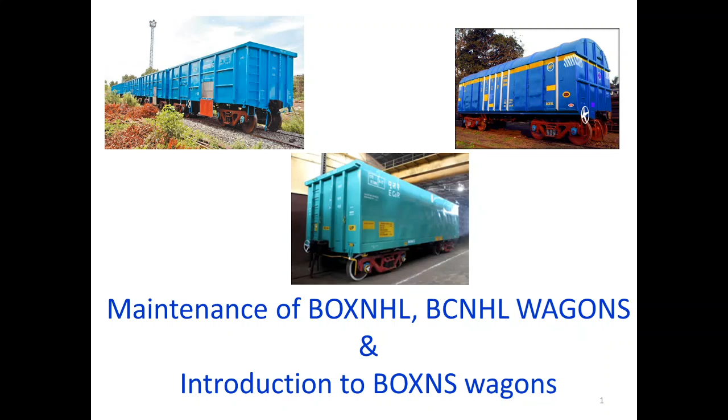Maintenance of box NHL, BCNHL wagons, and the introduction to box NS wagons.

With the economy of India growing at a very healthy pace, freight traffic has naturally been growing too. Freight is a profit-making business segment of Indian Railways, it is the bread and butter and backbone of Indian Railways. Revenues come from various sectors like coal, iron and steel, ores, petroleum products, essential commodities such as food grains, fertilizers, cement and others.

Indian Railway carries more than 35% of the total freight traffic of the country. Our target is 50% - in the coming 2 years we have to reach 50% of total freight traffic under Indian Railways. For that sake, we are striving hard to capture the market.

At present, two-thirds of our revenue comes from the transportation of goods traffic only. The other portion is from passenger and other sundry earnings.

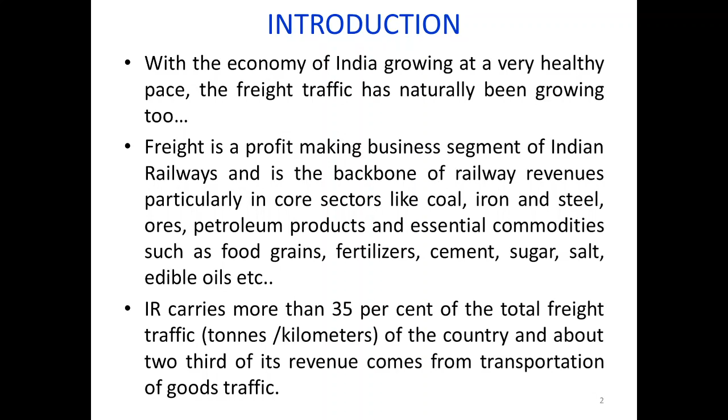To capture the market, we have to be friendly. We have to fulfill our customer requirements, like designing various wagons to meet the customer requirements. A quantum jump in the unit wagon capacity is the need of the hour.

One more thing is we have to reduce our tare weight of the wagon and increase payload to the tare ratio.

All our wagon stock should be switched over to 22.9 ton axle load wagons from 21.3 ton, and effort to bring lighter and corrosion resistant materials like IRSM 44.

Earlier we used IRSM 41 and IS 2062, those are corrosion prone. To give more life and less maintenance and light in weight, this IRSM 44, that is ferritic steel, is to be used on all our wagon stock, mostly open wagons and covered wagons.

In addition to that, to improve the payload to the tare ratio of wagons - just you can see here, BOXN wagon was 2.5. When payload to the tare ratio goes on increasing, we can achieve more commodity transported. Throughput will be more. If you compare with BOXN and box NHL, nearly 1 has been increased.

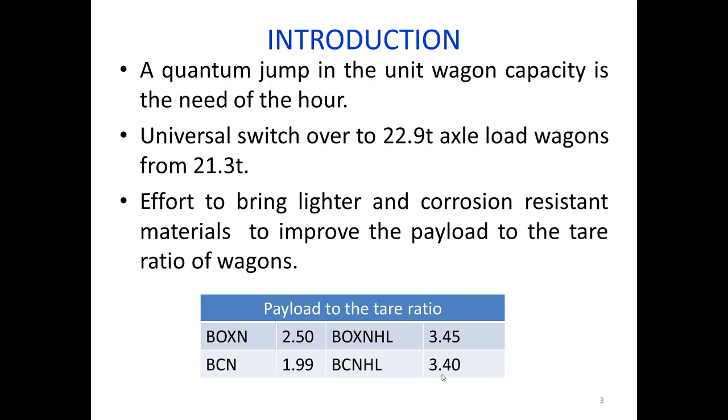We introduced box NHL, BCNHL in the year 2007. Main constraint is our box and BC wagons are more prone to corrosion because we used most of the stock with the IS 2062 mild steel.

Afterwards, we started using IRSM 41 corten steel, but it also did not give sufficient results. So we switched over to IRSM 44 from the year 2007 onwards by way of box NHL and BC NHL design of wagons.

Mainly continuous exposure of our wagon stock to moisture and air and high temperature regions plays a role, and repair practices resulting in localized heating. Sometimes we are not using proper current. If you use more current, it will deteriorate our metal wagon's body, and it may lead to corrosion.

And loading unloading practices resulting in damages to the employed surface protection - especially box wagons are more prone to damage while loading and unloading practices.

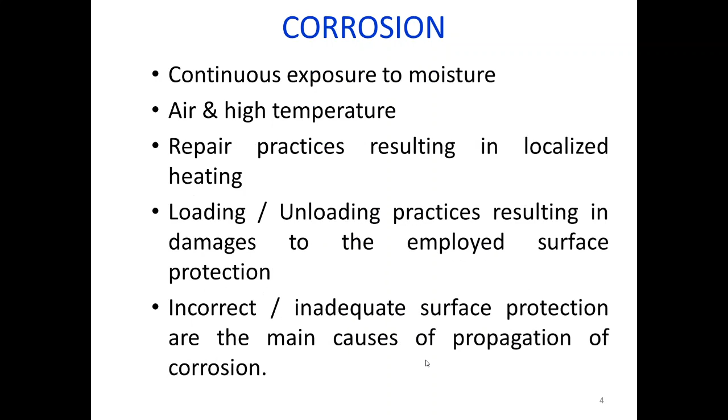So to overcome all this, railway board has decided to implement corrosion resistant steel to tackle the corrosion resistant raw material for fabrication of wagons. That material should be free to weldability and easy of fabrication - formability, bending, cutting, and all should be easier.

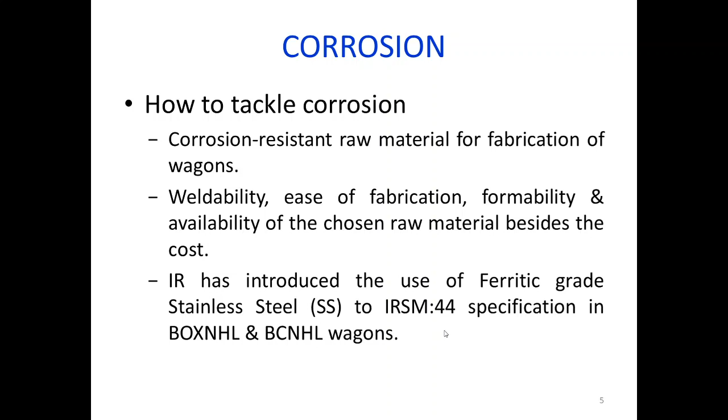And availability of the chosen raw material, besides the cost point of view; it should not be too expensive. For that sake, Indian Railway has introduced the use of ferritic grade stainless steel, that is IRSM 44. IRSM 44 is a ferritic steel that is chromium rich. It will be used on BOXNHL and BCNHL wagons.

Normally, chromium rich metal will delay getting corrosion. If you see in the graph, for example, 8% of chromium added in steel delays the corrosion. The y-axis here is mm per year. The metal cross section will get corrosion of 0.025. Here you can take 0.0125 only.

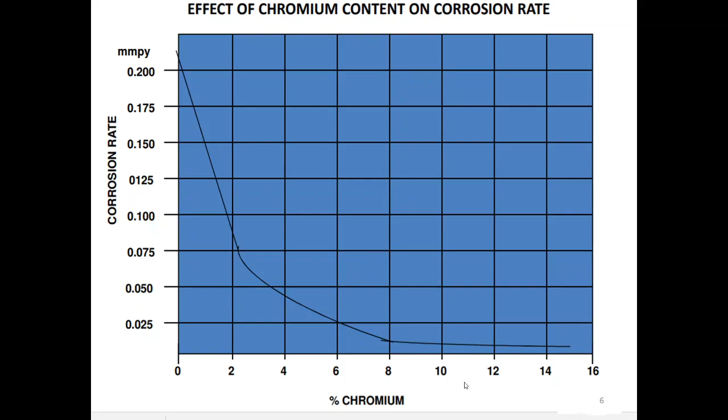If there is no chromium, it will get corrosion more frequently, meaning in less time it will catch the corrosion. To overcome the corrosion, we have to add chromium in the stainless steel material. If you go on increasing the chromium quantity in stainless steel, it will delay the corrosion to the metal.

By using stainless steel, what are the benefits achieved? Less corrosion. Less corrosion means reduced maintenance and reduction in tare weight. Moreover, the thickness of the steel: normally on the mild steel BOXN wagon the side body thickness is 5 mm, whereas in BOXNHL it is 1 mm less. Floor thickness for the BOXN wagon is 6 mm, in BOXNHL 5 mm. So automatically the weight of the body will be reduced, and the payload to tare ratio will be more.

Another advantage is less fuel consumption in empty running because of reduced load. No need to attach more locos, multi is not required, less requirement of loco crew and path, and extra line capacity is available, which will clear the section easily, and less incidences of out of course repairs. There is no corrosion, so automatically the duration of maintenance will be reduced.

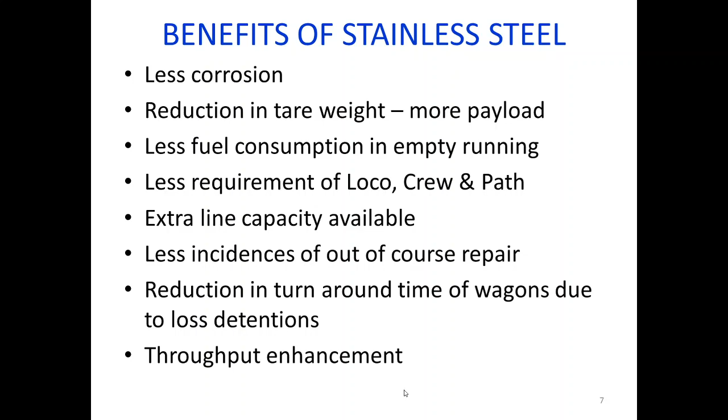This BOXNHL was designed in the year 2006. Mainly, it has to transport more load, more commodity. For that sake, we have enhanced the axle load capacity from 21.3 to 22.9 ton axle load for both BOXNHL and BCNHL wagons. It is the first all stainless steel open wagon with 22.9 ton axle load. It was designed in the year 2006. Railway Board placed orders for procurement of BOXNHL wagons in the year 2007.

Superstructure is all stainless steel for reducing weight and corrosion; the main body will be stainless steel. Improved quality coupler and draft gears. Initially they used WD-48-BD-028, and at present we are using WD-71-BD-15 for draft gears, and for couplers WD-70-BD-15 Revision 2. Lower brake block force with K-type composite brake blocks: instead of L-type brake blocks, in BOXNHL and BCNHL we are using K-type brake blocks.

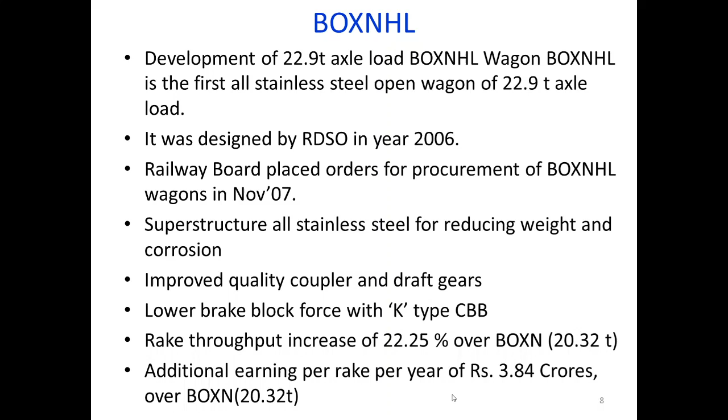Rake throughput increases by 22.25% over BOXN, and additional earning per rake per year is 3.84. These are the advantages with the implementation of BOXNHL. Coming to BCNHL, BCNHL is the first all stainless steel covered wagon of 22.9 ton axle load. It was designed by RDSO in the year 2006, and 2007 onwards we are getting the wagons.

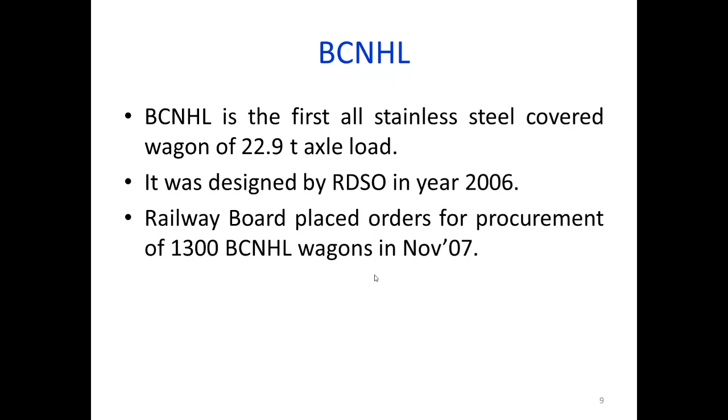The CBC provided on both BOXNHL and BCNHL wagons is a complete assembly of upgraded high tensile centre buffer coupler WD70. At present we are using WD-70-BD-10. Normally UHTC is stencilled on the side body of the wagon, showing these wagons are fitted with WD-70-BD-10. In addition, high capacity draft gears of RDSO specification WD-71-BD-15 revision 1 are at present used on BOXNHL and BCNHL wagons.

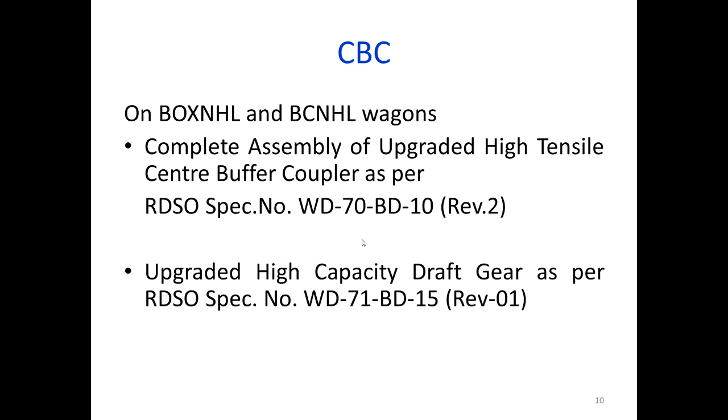By using these superior quality CBC couplers, we reduced train parting cases and knuckle failure cases also. You might have observed this. In addition, BOXNHL and BCNHL wagons initially started manufacturing with single pipe, especially BOXNHL, and BCNHL started with twin pipe brake system.

Subsequently, all the wagons are manufactured with twin pipe brake system. So, some of the advantages of the twin pipe brake system: it may reduce wheel skidding because brake binding cases will be reduced. So the train parting cases are also reduced. Driver feels more comfort in application and releasing of brakes.

So, in these BOXNHL wagons, one other item was introduced along with the bogie mounted brake system. Here it is, the automatic pressure modification valve. This automatic pressure modification device is interposed between the bogie side frame of the Casnub bogie and the under frame. Actually, it is fitted onto the under frame, and this is its arm. This unit will be fixed to the side body of the wagon, and this arm will touch the side frame of the Casnub bogie on the mid portion.

It is fitted for achieving two-stage load braking with automatic changeover of brake power. Normally, this activity was carried out earlier by the empty load gear device; that is replaced with this automatic pressure modification. This will be provided on each wagon. Only one APM is required per wagon, and it restricts the brake cylinder pressure. Normally, in case of empty wagons, the pressure that goes to the brake cylinder will be 2.2. This will be fitted in between the distributor valve and the brake cylinder.

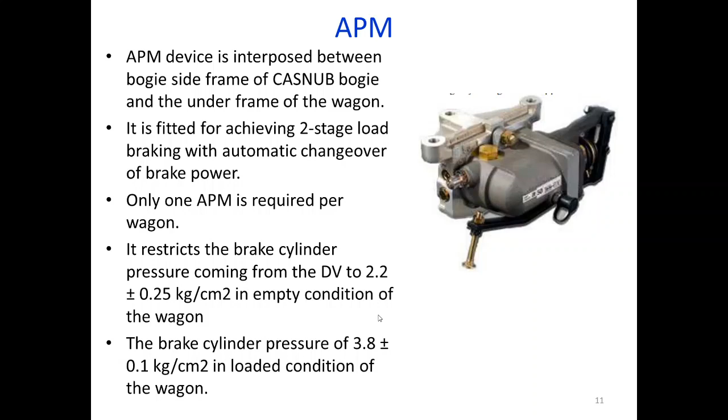So when the arm touches at around 104 mm length between the side frame and the arm, then 2.2 kg/cm² will be sent to the brake cylinder, in empty condition. Whereas if loaded, the length of the arm will be reduced to 80 mm. At that time, the brake cylinder pressure will be 3.8. Full brakes will be applied during load condition, and less but sufficient brake power in empty condition.

The sensor arm of the APM device comes down for sensing only during the brake application. The complete movement of the sensor point is 104, sorry, I said 140, it is 104. The first 80 mm of the sensor point is for the loaded zone, and the balance for the empty zone. Up to 104, the first 80 is the loaded zone. If it touches at 80 mm, the full brake power, meaning 3.8 kg/cm², will be sent to the brake cylinder. So firm brakes will be applied.

It has an indicator to show the empty or loaded position also. Whenever the indication is on, that is, showing orange color, it is indicating the empty condition with brake cylinder pressure 2.2. When there is no indication, it means the wagon is in loaded condition. The brake pressure will be 3.8.

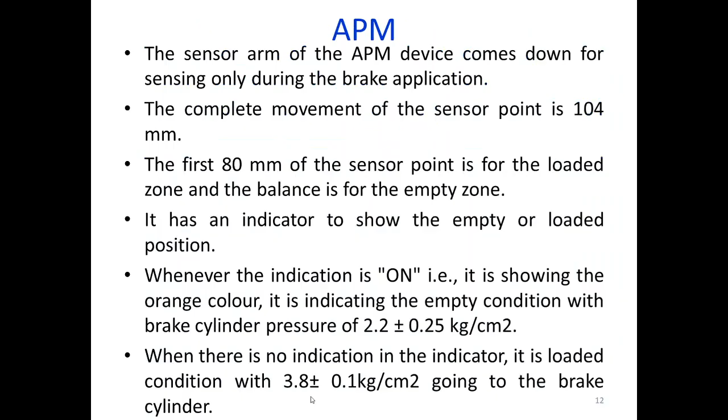Okay, these BOXNHL and BCNHL wagons have been provided with BMBC brake system with twin pipe brake, and the empty load gear has been eliminated with APM, and the hand brake system is provided on the ends of the wagon body. The handbrake wheel has been provided at the end of the wagon.

Okay, if you compare the wagon with the BCN, BCNA and BCNHL, the length has been decreased by 3.4 meter, overall width increased by 250 mm, and inside width by 401 mm. Inside height is increased by 347 mm. Height from rail level is increased by 288. Cubic capacity 10.9. Tare weight of the wagon is reduced by 3.75 tons. So, tare weight of the BCNHL is 20.8. So, it has increased the payload to tare ratio.

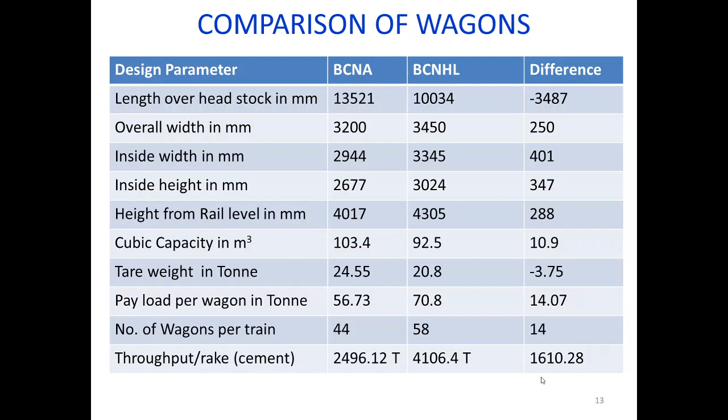And the number of wagons has been increased. Actually, the BCN wagon was 13.5 in length, whereas BCNHL is 10.034. We can accommodate approximately 14 more wagons in a rake, so that we can transport more commodity compared with the BCN rake, that is 1610 more tons per rake. This is the advantage over BCNA. All these superlatives will lead to more revenue for the railway.

Coming to BOXN and BOXNHL, here also length has been increased by 250 mm, overall width by 50 mm, and inside width by 72. Inside height also increased by 78. Height from rail level is 68. Cubic capacity has also been increased. Tare weight of the wagon here also decreased to get more payload to tare ratio.

Payload per wagon in tons is 71.0, so that when we are transporting a 58 wagon rake, around 750 metric tons more will be loaded at a time. This is the advantage over BOXN.

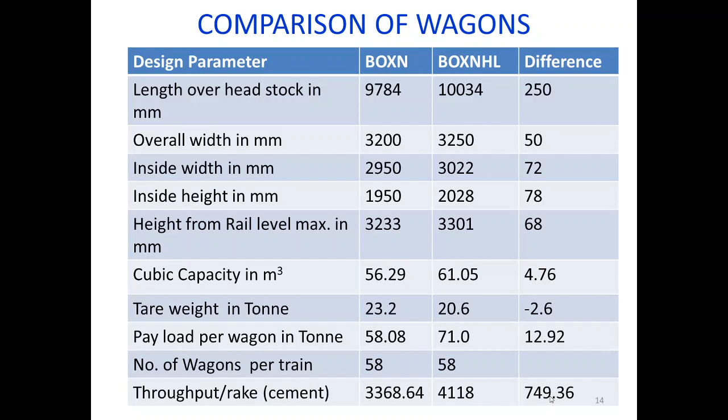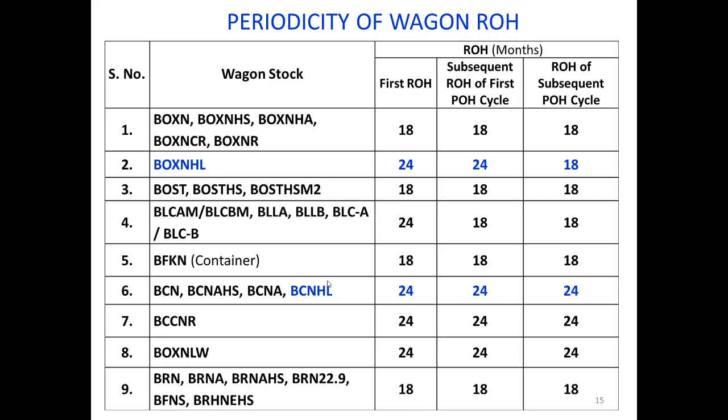Okay, periodicity. When we have to mark POH or ROH, there was confusion earlier, but it is clear that up to the first POH of the BOXNHL wagon, ROH will be 24 months. After the first POH, ROH will be 18 months. Whereas BCNHL is the same, similar to our BCN wagons. Coming to POH, the first POH will be 6 years, subsequently 4.5 years. Same in case of BCNHL, it will be similar to the BCN wagon.

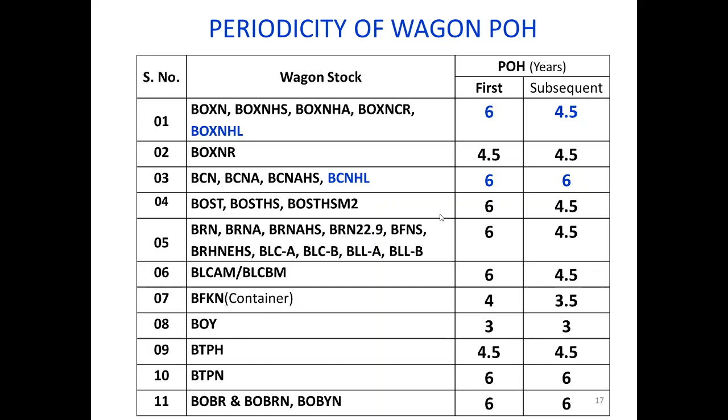Okay, it has been over 13 years since BOXNHL and BCNHL wagons were introduced over Indian Railways. In the past 13 years, you might have faced some problems with these stainless steel bodied wagons. Normally our staff, like fitters and welders, are not habituated with it, because IRSM 41 44 steel, that is ferritic stainless steel, will give some maintenance issues.

Maintenance issues like cutting. Normally, we cut our mild steel or Corten steel sheet with oxyacetylene cutting. Okay, but stainless steel is not so easy to cut with oxyacetylene. Its refractory index will be more, so we could not get an equal straight cut, and moreover there are chances to damage or deteriorate the material properties of the stainless steel. So it is not advisable to cut stainless steel material with oxyacetylene cutting.

So in each and every depot, workshop, maintenance sick line and yard, we have to procure plasma cutting equipment. Plasma cutting provision should be provided in all yards, depots and workshops, so that we can easily cut the stainless steel sheet.

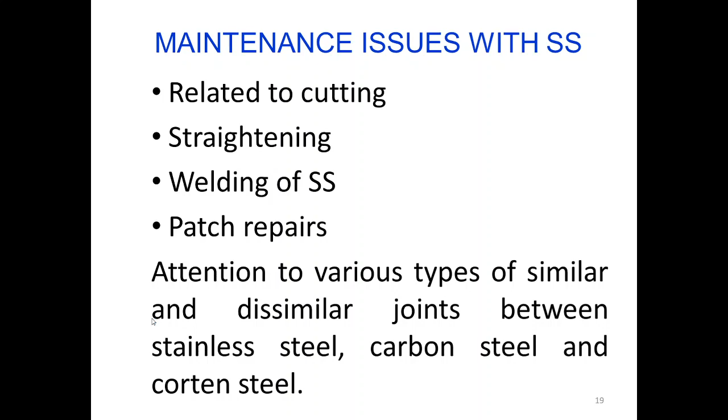Okay, coming to the particularities of stainless steel. Carbon steel rusts when exposed to air and moisture. Normally carbon steels like mild steel and Corten steel will easily corrode if exposed to air or moisture. But if the same steel is rich with chromium, then automatically a self-healing chromium rich oxide surface will be formed over the metal surface.

If you add chromium in steel, it will form on its own a self-healing chromium rich oxide surface film. For chromium, exposure to atmosphere means oxygen; if it is exposed to oxygen, it will protect on its own. So it is an invisible, adherent and self-healing chromium rich oxide surface film over the steel surface. Ferritic steel will have chromium so that it will protect on its own.

So our wagon body should be exposed to the air more. Normally, if any patch covers that surface and you are doing right round welding over the patch, any gaps or porosity in welding may lead to corrosion inside. Behind the covered portion it will corrode easily, because sufficient oxygen will not be there inside, and moreover water ingress will be there, so it may lead to corrosion.

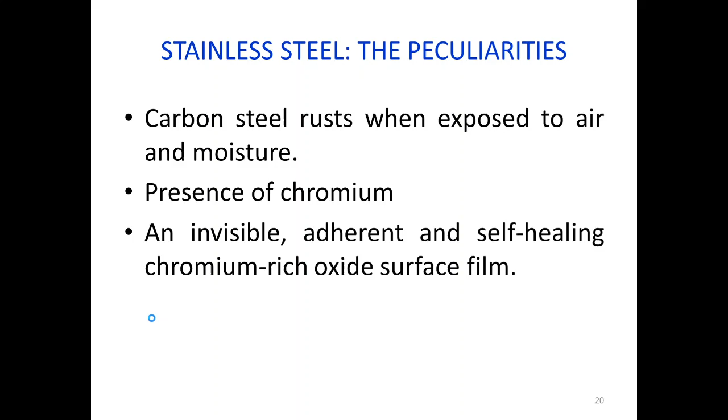Another peculiarity of stainless steel: when chromium is added to the steel, it is called stainless steel. This stainless steel will be tough because the chromium oxide layer is tough. So the tough chromium oxide layer also comes into play during repair, while cutting.

Especially in cutting. In conventional carbon steels, cutting is done by the oxy cutting process, the oxyacetylene cutting process. In case of stainless steel, it is possible, but it is not advised. Moreover, we could not get a correct cut, and it will deteriorate its material properties if you cut with steel cutting.

High levels of chromium cannot be cut by simple oxy cutting methods due to the refractory nature, the very high melting point of the chromium oxide which is formed as a top layer. Since it has a very high melting point, we keep exposing our oxy jet to that surface of the metal. This continued heating will deteriorate the chromium oxide layer, so the properties will be given up.

So ferritic stainless steels are generally limited in service temperatures. Normally, while doing welding also, we have to maintain 400 degrees centigrade; if you go beyond that, embrittling phases may also precipitate during welding. So these ferritic stainless steels are advised to be cut with plasma cutting.

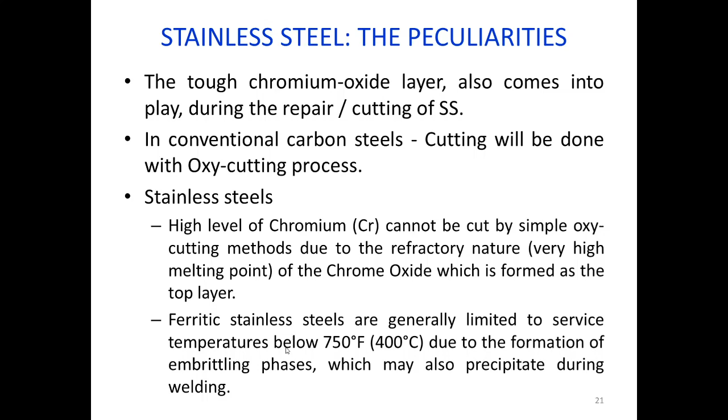It was introduced before in BOXNHL wagons. It was introduced as an SS side body on BOXN during rehabilitation, and in addition, BOXNHL and BCNHL were introduced with this stainless steel IRSM 44. Some of the sections on the underframe will have IRSM 41. The wagon body and underframe are made of higher grade steel, that is IRSM 44, and at some locations on the underframe, IRSM 41 steel and CRF sections.

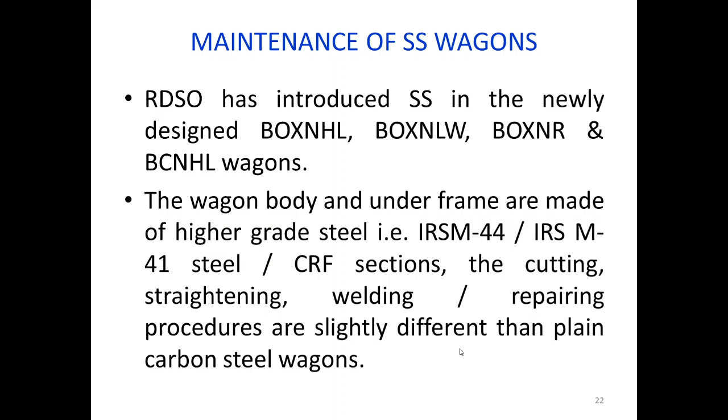The cutting, straightening, welding and repairing procedures are slightly different than for plain carbon steel wagons. It needs some skill to handle stainless steel materials, and it is important to understand that for SS wagon structural members, body panels, and other components that form part of the wagon structure, corroded and damaged parts must be repaired or replaced with similar grades of steel only. Similar grade means the same IRSM 44. If the body of the wagon is IRSM 44, the patch must also be IRSM 44.

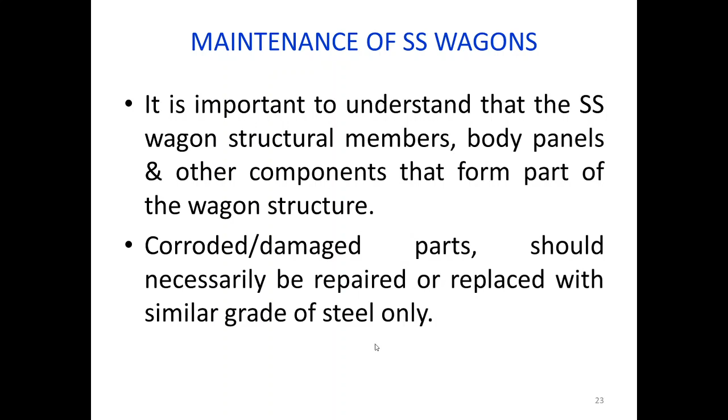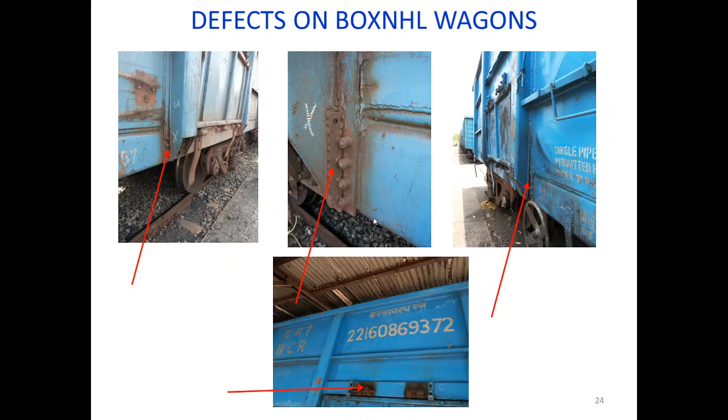Some locations were patched with mild steel. Here it is. Some of the locations are patched, but nowadays we have started procuring stainless steel materials, stainless steel ferritic IRSM 44 material, in the depots as well as yards. So the earlier practice of providing mild steel patches, we are restricting, and we are using stainless steel patches.

To handle stainless steel wagons and stainless steel maintenance, we need a minimum requirement. The minimum requirement is MIG, metal inert gas welding, or metal active gas welding, or DC arc welding. MIG-MAG welding is mostly suitable for ROH depots and workshops, whereas in the sick line and open yard lines we need DC arc welding rectifiers. A freight yard maintaining 3 rakes per day needs at least two MIG-MAG or two DC arc welding sets. And if you maintain 5 wagons in the sick line per day, we have to procure two MIG-MAG or two DC arc welding sets.

In case of ROH and POH depots, they are handling 200 wagons per month. We need at least 3 MIG-MAG welding sets or 3 DC arc welding sets, and in addition we have to provide portable air plasma cutting machines. Portable air plasma cutting machines are required to cut the damaged portions or any sizable plates.

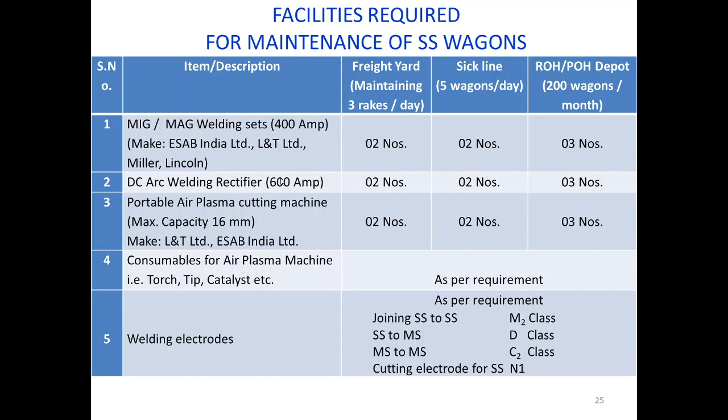Some locations where plasma cutting is not possible. Okay, already this oxy-acetylene we should not use. Then at that time some areas we have to cut with the electrode. In that case, we have to use N1 electrode, N1 electrode for cutting SS steel plate. Okay, these are the infrastructure required in our working area, like yard or sick line and ROH or POH shops.

In addition to that, some areas we are using lock bolting. If you are maintaining many wagons, there we need to keep this facility, and we have to train up the staff in using lock bolts as well as joining the steel thickness. If the thickness is more than 6 mm or 8 mm sheets, we have to use lock bolt equipment. And a portable grinding machine.

As soon as completion of our manual metal arc welding, normally we do MMAW in the open line. In that case, as soon as the welding is completed, we have to grind the surfaces with the help of a portable grinding machine. Here dedicated grinding machines are required, wheels are required, because wheels and discs are the areas where contamination will be there. If you use the same disc for other mild steel surfaces and afterwards use that same wheel disc on the stainless steel, contamination of the metal will be there, so there are chances of corrosion. We have to avoid that.

For that sake, we have to keep dedicated grinding wheels sufficiently, and stainless steel wire brushes. It is another important area for cleaning. Before welding and after welding, we need a steel wire brush. So we have to use steel wire brushes where the bristles should be stainless steel. We should not use normal MS brushes.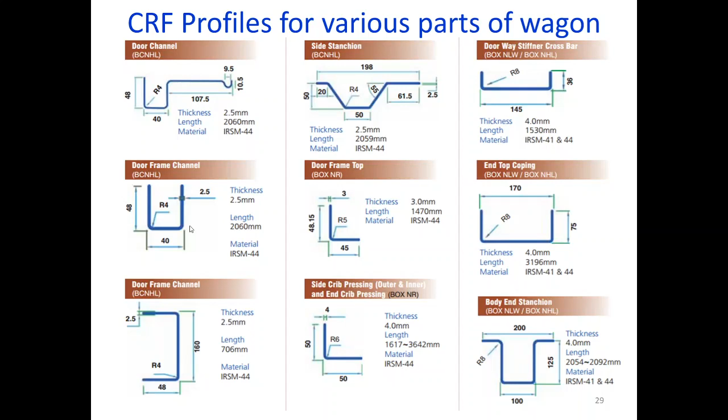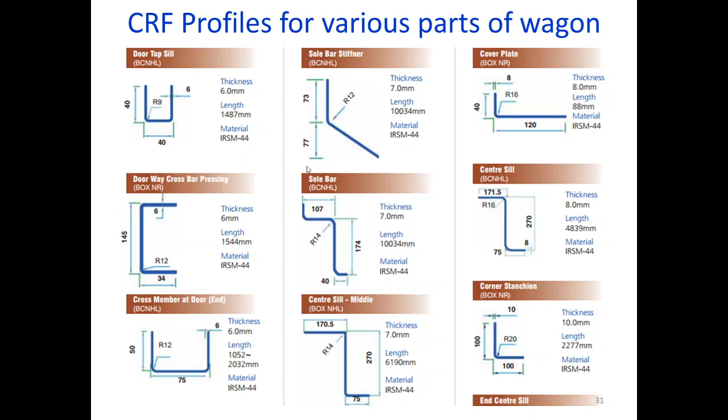Namaskar. And on BOXNHL, so many components are not there, but especially on BCNHL, because the thickness is less; up to 7 mm it is difficult to bend stainless steel, so it is easier to procure from the market by placing non-stock indents.

Okay, coming to the maintenance issues, the inspection and maintenance activities. Normally, we conduct inspection first. Then whatever the damaged portion is, that should be cut with the help of plasma cutting, and wherever a bent portion is there, that should be straightened with the help of various gadgets. To handle stainless steel wagons, we have to develop various gadgets in our depot premises as well as workshops, so that workmen may not feel fatigue while getting the bent portion to its original shape. So we have to develop sufficient gadgets to handle the wagons.

Replacement of the sheets should be 100% with similar metal. In case of handling IRSM 44, we have to replace with IRSM 44 only. Welding is an important activity in handling wagons, whether mild steel or stainless steel, but we have to pay more care while welding SS wagons. More skills are required, so we have to send our welders to get qualification certificates for stainless steel wagons and coaches.

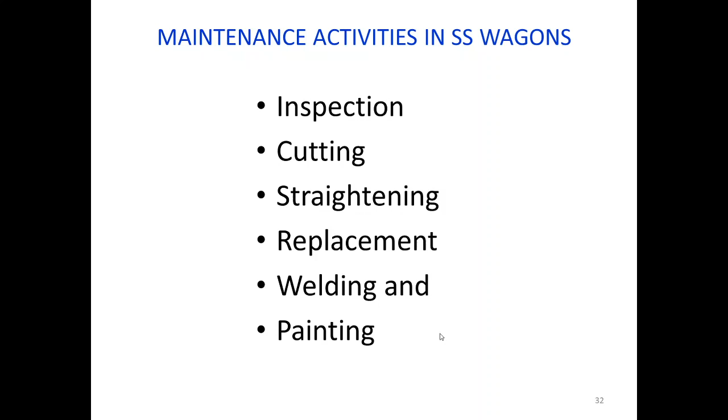As soon as welding is completed, some areas require painting, so we apply one coat of paint. Okay, we'll see one by one.

Inspection: thoroughly inspect for locating cracks, bends, damage, and corroded members, because stainless steel wagons don't have that much ductility. If sudden impact happens on the bogie or floor, it may puncture the plate. So to check whether some impact loads or sudden loads have affected vulnerable locations where we may not see easily, those areas should also be thoroughly inspected.

We should not believe the stainless steel body is immune to damage. Cracks may develop rapidly due to impact loads, so thorough examination in the yards is very important.

Under-frame members, especially the body, and importantly the sole bar, is an important item. The sole bar of this box NHL will be 6mm thickness. This sole bar channel should be checked during our inspection.

Cross stringers and longitudinal stringers: longitudinal stringers are 4mm and sole bar is 6mm. It's stock fabricated from IRSM 44 only. Side stanchions and side body sheet, as I told, 4mm thickness side body sheet we are using, and middle copings.

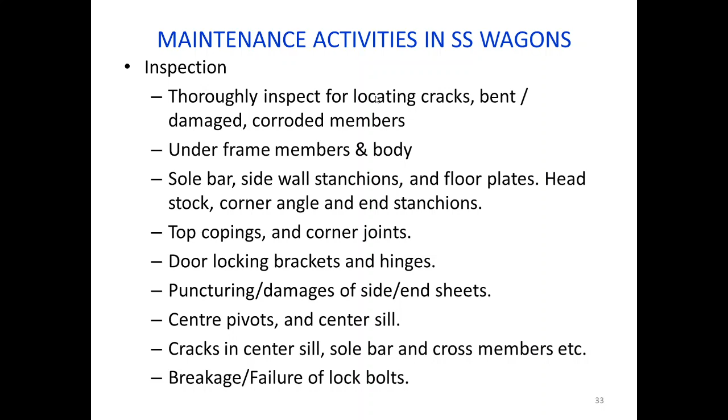Coming to maintenance activities in part 2: cutting. After inspection, cutting of the plate is an essential activity in our maintenance. Normally, mega depots dealing with more box NHL or BCNHL wagons must procure shearing machines, which should be procured by depots, though normally these are available in workshops. Major depots should get shearing machines so cutting is faster and easier. We could not pay more attention while doing cutting and straightening, so cutting should get a straight cut.

For that sake, we have to procure shearing machines in the depots.

Here's one more important thing: while cutting the plate, you have to keep clearance between the bottom and top blades. How much clearance? In case of 3mm plate, keep clearance of 0.1; for 6mm, keep 0.15; for 10mm plate, keep 0.25.

If you keep more clearance than required for example, for a 3mm plate, if you keep 0.2 or 0.3 instead, then what will happen? First of all, the metal will not cut properly. If it does cut, it may get rough edges in the sheet, which is injurious to our handling stock. So we have to maintain proper clearance while cutting these IRSM 44 sheets.

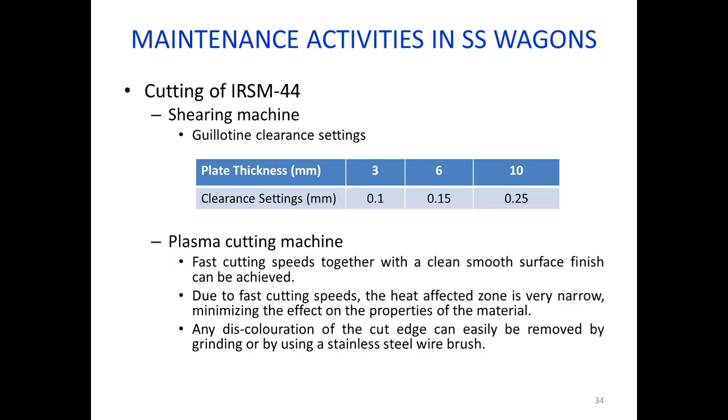Next, for cutting of mild steel, we have to use abrasive cut-off wheels. Normally grinders or cutters will have abrasive disc cutting attachments. For the sake of abrasive cutting, we have to procure abrasive discs.

Only dedicated discs should be used, and suitable control of the storage must be exercised. Whatever disc is used for cutting mild steel or stainless steel should be kept separately it should not be used interchangeably. Aluminum oxide discs of the vitrified or resinoid bonded types are suitable.

Zirconia silicon carbide discs are not recommended, because zirconium will have...

Well, what happened? What happened? Keep your mobiles on mute, please.

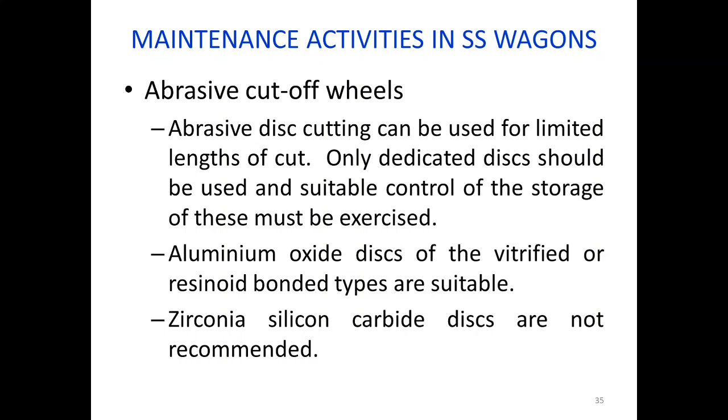Okay, zirconium where is it used? Normally in nuclear power plants, zirconium tubes are used, which melt quickly, and it is prone to corrosion when not properly handled. So zirconia silicon carbide discs are not suitable to cut stainless steel sheets that we have to keep in mind. RDSO has advised all these specifications to be used on stainless steel.

Arc-Air gouging is sometimes used as a suitable cutting method, provided the recommended settings are followed in order to produce acceptable cuts. All cut edges must be ground back to a depth of approximately 2mm to remove the heat affected zone before further fabrication. Areas not subsequently welded must be descaled and passivated.

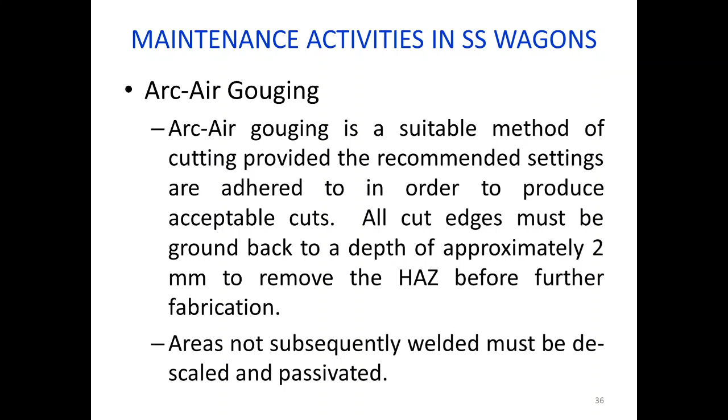Normally we may not use arc air gouging, but we generally use plasma cutting. Wherever gouging is required, we use N1 electrode to cut the plates.

Other processes also advised by RDSO include powder cutting, slitting, cold sawing, blanking, and punching. Normally these are advisable for mild steel sheet, not so much for IRSM 44 stainless steel sheet cutting. Production units like Braithwaite and other standard companies have these facilities, but depots and shops don't require them they mainly need shearing machines, and plasma cutting machines are required more.

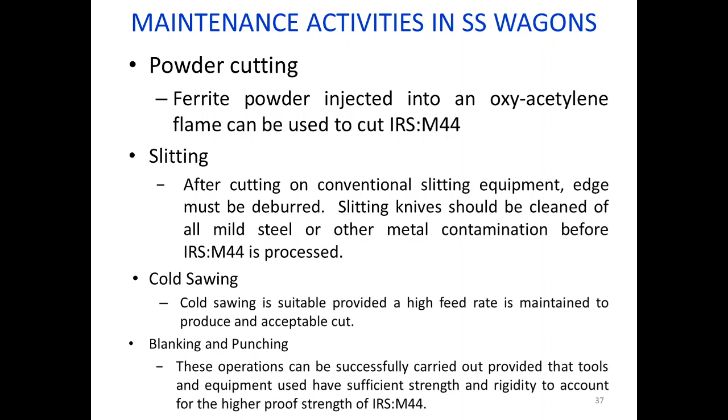Coming to straightening, this is also somewhat a difficult task with IRSM 44. It is notable that IRSM 44 requires greater bending capacity to straighten the steel members owing to its higher yield strength. Normally, bending capacity is reduced by 40% for IRSM 44 compared to mild steel. IRSM 44 also generally exhibits greater spring back.

When bending the sheet, we have to take enough care, and develop various gadgets like hydraulically or manually operated tie-screw pulling and hammering, whenever possible by lightly heating the area to 150 degrees centigrade we should not heat more than that. If you keep heating beyond that, the properties of chromium will be deteriorated. So we should only lightly heat and bend with the hammer to straighten the sheet.

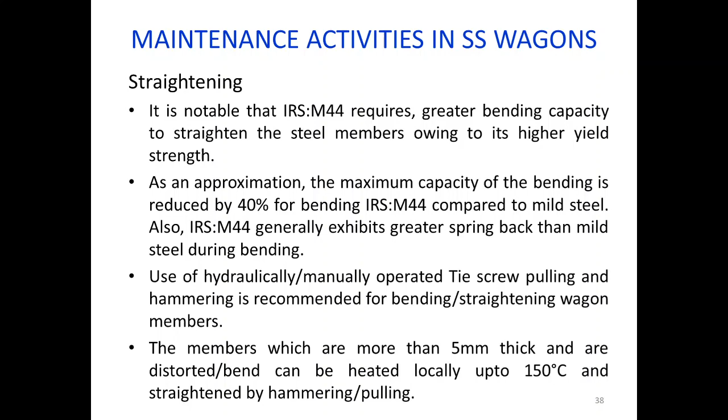Another general point to handle IRSM 44 stainless steel: the whole underframe and superstructure is made of ferritic stainless steel IRSM 44, except the end portion of the center sill, which is made of mild steel IS 2062, and the cross members, which are IRS M41.

Here we have to use dissimilar welding. I have already covered in the other slide that for joining SS to SS M2 class, if using MMAW welding, manual metal arc welding, our conventional welding, we can use M2 class electrodes for joining SS to SS.

In case of MIG or MAG, metal inert gas or metal active gas welding, normally available in workshops and production units, there we have to use the spools of class 6 category.

Class 6 category weld spools, electrodes, weld wires should be used in case of MIG or MAG welding for joining SS to SS. In case of SS to MS, normally underframe activity will be with SS to MS. There we have to use D class electrode in case of MMAW, manual metal arc welding, conventional type of welding.

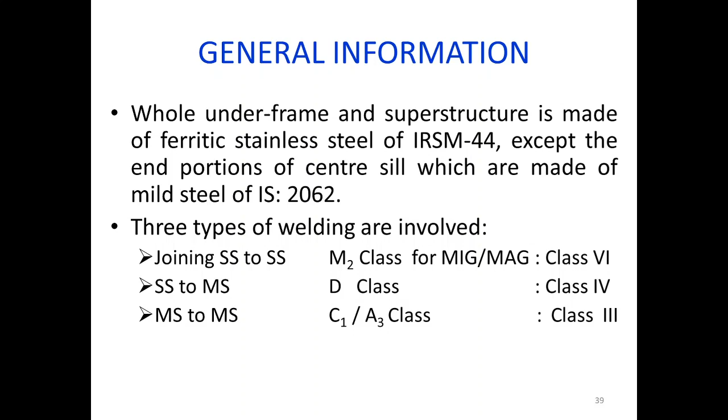For the health and good environment of the working area, we must preheat the electrode so that all will be safe, and our weld bead also gets good, and welding penetration will also be good. For that, each and every electrode we must preheat at a temperature around 110 degrees centigrade.

All our welders must be trained as per IS 7310 part 1. Normally in our open line, some workshops are outsourcing welders, but whoever it may be, we have to get certification of IS 7310, because they will be trained and certified on how to handle SS welding and SS wagons.

Recommended welding practice: MIG, MAG, or MMAW. Normally SAW and other things are not required here. In case of metal inert gas, metal active gas will be used in our ROH depots and shops. In sick line and other areas, we are using MMAW.

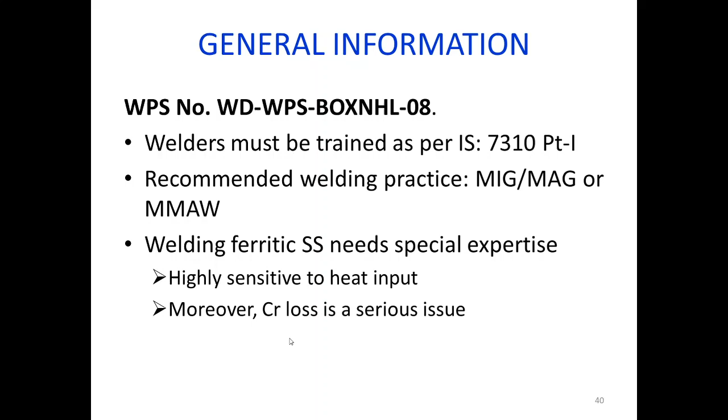Welding ferritic SS needs special expertise. For that, we have to send for training, because it is highly sensitive to heat input, and moreover chromium loss is a serious issue. If chromium loss occurs on the metal, automatically it will deteriorate its properties, so it will behave like normal mild steel. So while welding stainless steel, we have to take enough care.

We must meticulously use different types of electrodes as specified in WPS, welding procedure specification. As per WPS given by RDSO, we have to go accordingly. In case of SS welding, we have to use SS electrodes of M2 class, both 3.15 mm dia and 4 mm dia electrodes, in our maintenance practice.

Infrastructure is to be developed for proper storage and special care to avoid absorption from the floor. Whatever spare electrodes, those should not be kept on the floor, we have to keep them in flasks. Portable flasks have been given to depots and workshops for various welders, so any leftover electrode should be kept inside the welding electrode portable flask.

And SS wire brush, chisel for SS welding. Not only electrodes, stainless steel sheets also should not be kept on the floor and should not be kept on the MS racks. We have to take enough care that while stocking our stainless steel sheets, IRSM 44, we have to keep them in our stainless steel racks only, not in our mild steel racks.

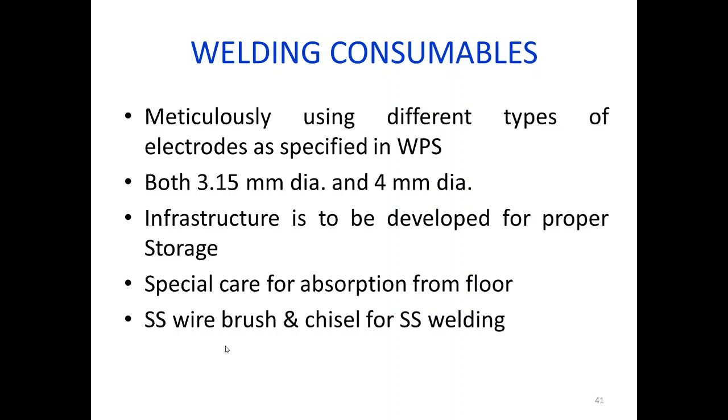Wire brushes and chisels should be exclusively used for SS welding, not used for any MS steels. Edge preparation, wherever required, normally more than 6 mm, we have to prepare the edge like a slant shape. For example, in butt welding we need to form a V shape with both ends slant. For more than 6 mm, normally profile cutting machines do this, but here plasma cutting is already available.

So while cutting 6 mm or more than 6 mm material sheets, we have to keep the jet slanted, so that automatically you will get the slant portion at the edge. Avoids grinding and produces a better edge. We need not go for grinding also. Just one go, we'll cut the sheet as well as get the slant edge.

And light dressing by grinding stone, not wheel, to remove oxide layer. Okay, wherever it is required, we have to grind with the grinding stone. All edges should be prepared before tacking the pieces together. Large amount of metal deposition may be avoided.

This large amount of metal deposition means we have to maintain the arc. It should not be a long arc or shorter arc, and the travel speed of the electrode should be maintained properly. Higher heat input affects mechanical properties of stainless steel. Higher heat input is always avoided while handling stainless steel sheets.

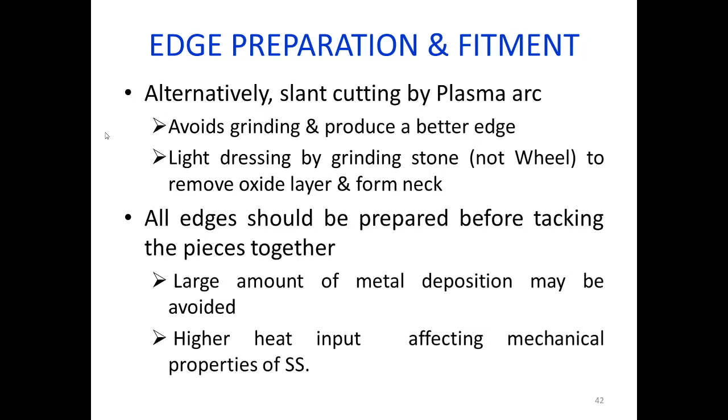Preheating, okay, already we discussed preheating of electrodes. Preheating is highly important as it reduces hydrogen content of weld, responsible for delayed cracking. Preheating is not only a healthy environment, it also gives more strength to the welding bead, welding joint, by reducing hydrogen content of weld.

If the electrode has hydrogen, what will happen after carrying out the welding activity? There are chances of cracking over the welding joint. So we have to go with preheating of electrodes religiously. Electrode preheating ovens must be installed near workstations. For that sake, portable ovens may be provided to all welders so that they will use them compulsorily.

A non-contact type pyrometer can be kept in the shop for cross-checking. This will be already available in the rolling examination and roller bearing temperature testing. That may be kept on the shop floor also. Whether the welding flask maintains sufficient temperature or not, that will be checked with the help of the non-contact type pyrometer.

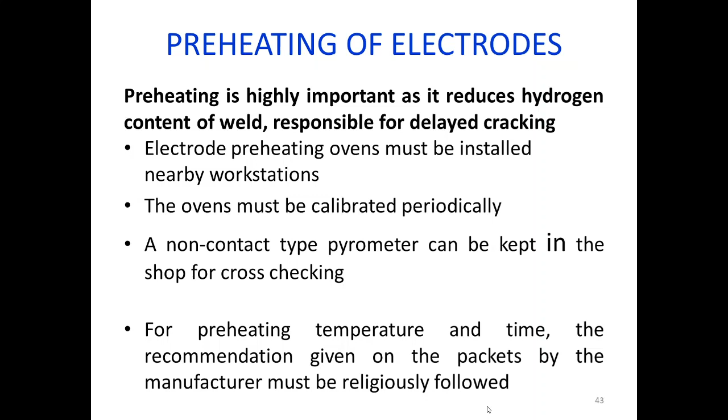Nowadays we are using them widely to check the temperature of human beings in the COVID crisis. Likewise, you have to keep sufficient non-contact type pyrometers in the shop floor working area, to check whether the flask is correctly maintaining temperature or not. Preheating temperature and time recommendations given on the packets by the manufacturer must be religiously followed.

Welders should not take a bunch of electrodes. Whatever electrodes are left over should be kept in the flask only, not on the floor or desk or their cupboards. Most of the welders keep their leftover electrodes in their cupboards.

If you keep the electrode in the open area, moisture area, automatically it will absorb moisture and its properties deteriorate. When you weld with that electrode, it will emit more smoke, more fume. So people near and around will get affected. It is hazardous to the people near and around. For that sake, we must preheat electrodes and procure flask type portable ovens.

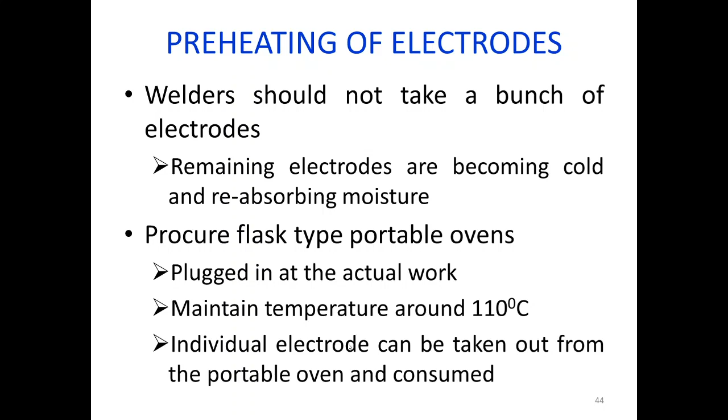Each and every welder should be given portable flasks for electrodes, plugged in at the actual work. Maintain temperature around 110 degrees centigrade. That should be cross-checked with the help of non-contact type thermometers. Individual electrodes can be taken out from the portable oven and consumed as and when required. We have to pick the electrode from the oven. That is good for welding.

And basic qualification of welders should be checked. Mostly ITI qualified should be engaged for welding. And the welding procedure specification calls for welders certified as per IS 7310 Part 1. Welders must be trained in this specification. And normally outside agencies, private institutes, like Advani, are providing it.

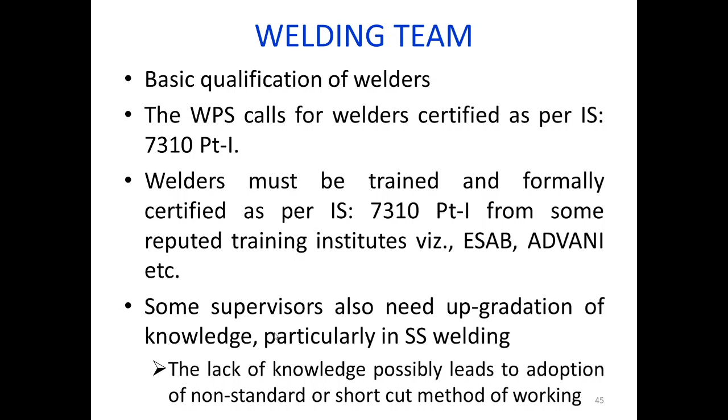Okay, lack of knowledge possibly leads to adoption of non-standard or shortcut methods of working, and they may not advise down the line properly. So we have to send the supervisors to train up in this SS welding practice, upgradation of knowledge. And welding workmanship following proper polarity. In case of DC arc welding, the polarity is very much important.

Normally, two types of polarities will be there if you use DC arc welding: straight polarity and reverse polarity. Normally, in reverse polarity our electrode will be connected to the positive of the holder, the electrode holder, and the metal will be provided to the negative. The earth clamp will be provided on the base plate.

Okay, this polarity will give sufficient weld strength with reverse polarity, whenever the electrode will have the clamp positive. If you keep the electrode positive, 2/3 of the current will be generated there, and 1/3 of the current will be at the base plate. So if you want more current at the electrode, we have to keep the electrode positive.

And if the thickness of the material is more, then you have to keep the positive terminal to the base plate. Okay, that way proper polarity will work. Polarity is only for DC arc welding, whereas in AC arc welding you need not worry because both are the same. And much higher welding current than recommended: normally we should not keep more current. Whatever is specified by the electrode manufacturer, that we have to keep according to the size of the electrode.

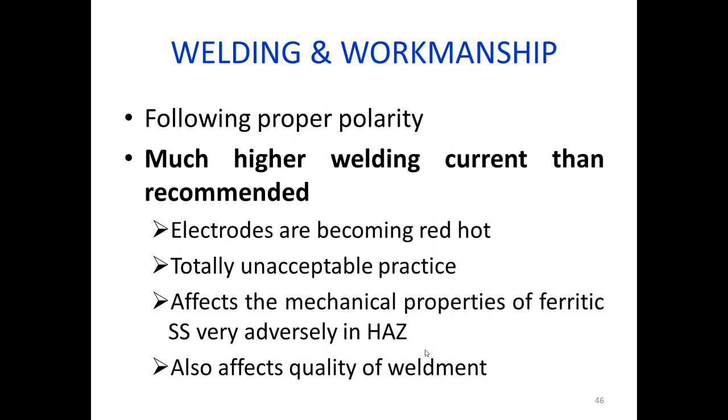And we have to use a calibrated tong tester to cross check the actual welding current, whether it is 100 or 120 or 140. And we can check OCV also. And welders should follow the back tracing or whip back technique. While completing the welding joint, you have to go back and come forward. That technique should be used in case of stainless steel welding. It will give a firm joint at the edge portions.

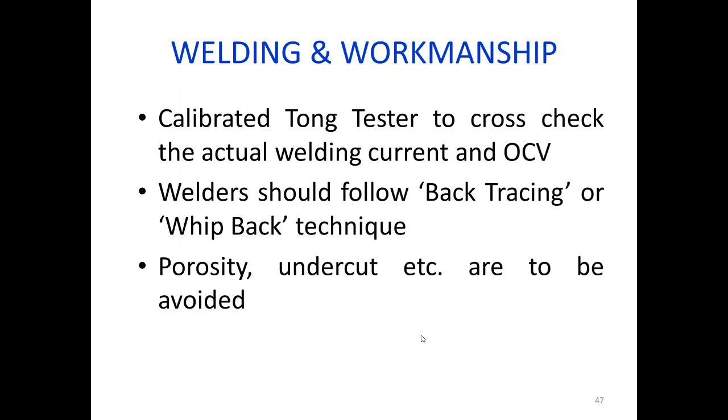And porosity and undercut should be eliminated. By proper cleaning of the material, we can avoid porosity. And if we maintain proper current, we can avoid the undercut. These should be followed. And manipulators: wherever possible we have to use a manipulator, so we can accommodate the welder to do the welding downhand. So wherever possible we have to keep the manipulators.

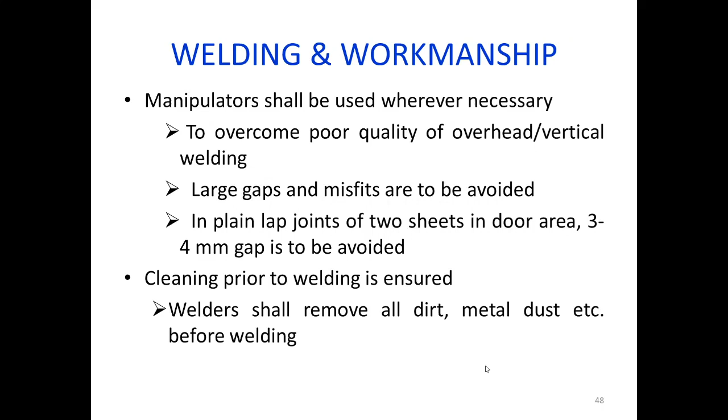And in plain lap joints of two sheets and the door area, a 3-4 mm gap is to be avoided. If you use manipulators, jigs or fixtures properly, the chances of creating a gap between the joints will be avoided. And cleaning prior to welding is ensured. The welder shall remove all dirt, metal dust, etc. before welding. General guidance: generally adjust OCV rather than current, and you will achieve the current correctly. We have to set the current first and then adjust the OCV.

And the size of tack welds is 30-50 mm. If the length of the welding is more, first you have to keep tacks at a distance of 350 mm. Normally the electrode length will be 350 mm. You have to give tack welds first, then go for full welding.

And fitment of aluminum lugs on all electrode cable joints. Here one wrong practice is going on that is to be avoided. Normally welders join two cable joints with the help of bare wire only. It should be avoided. Bare wire may lead to leakage of current, and leakage of current will develop heat. The heat will further destroy our cable insulation. So sometimes it may be hazardous.

So we have to insist that aluminum lugs should be used on each end of the cable. And by crimping the aluminum lug properly, we can avoid leakage of current. Edge preparation by slant cutting, and procurement of tong tester and pyrometer. The tong tester is to check the current while doing the welding, and the pyrometer to check the temperature inside the flask.

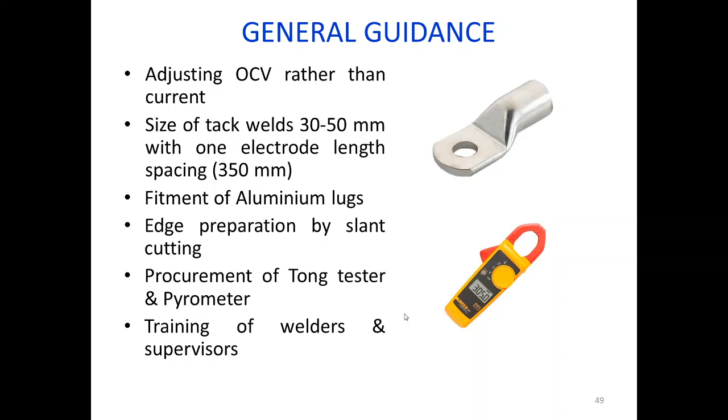How much the temperature will be there inside the flask, that should be checked. And all portable flasks or ovens, electrode ovens, must be calibrated time to time. And we have to give training to welders and supervisors also time to time as per WPS, welding procedure specification.

WPS. And attention on major areas of concern: preheating of electrodes, avoid high welding current, edge preparation and fitment, training to the staff, and formation of a welding inspection team. Where the welders are more, we have to form a team so that they can exchange their views and ideas to get a good quality of weld.

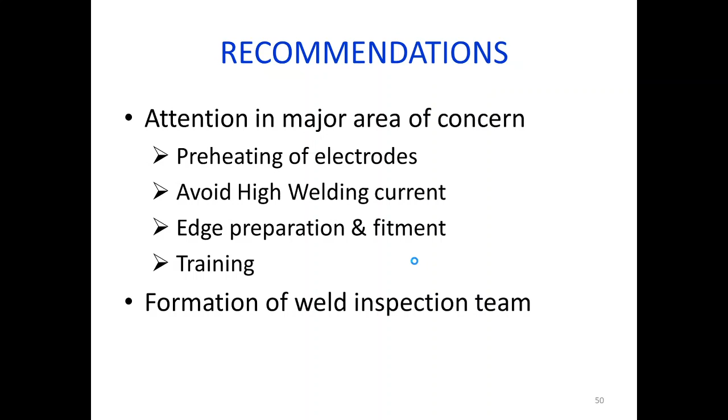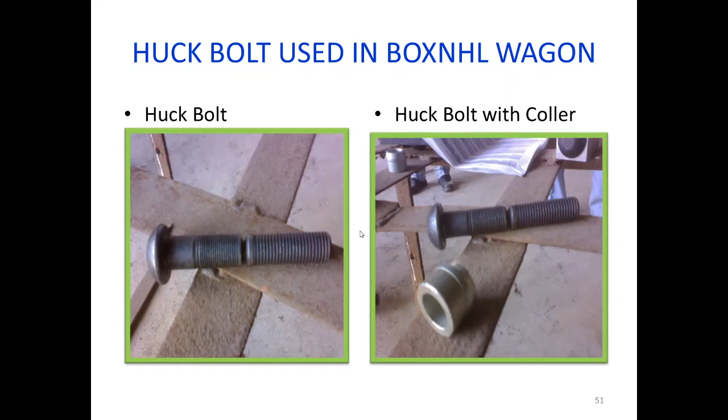Okay, another joining of material is huck bolting. We have to train up on huck bolting techniques, how to handle the tools and power pack during huck bolting.

Okay, coming to the BOXNHL. Earlier, this BOXNHL was designed with a width of 3250. Then whatever doors were provided, hinge type doors initially in generation 1, if you do not close the doors, what will happen? There are chances of hitting fixed structures like signals or OHE, and any other hydrants nearby the track will be destroyed.

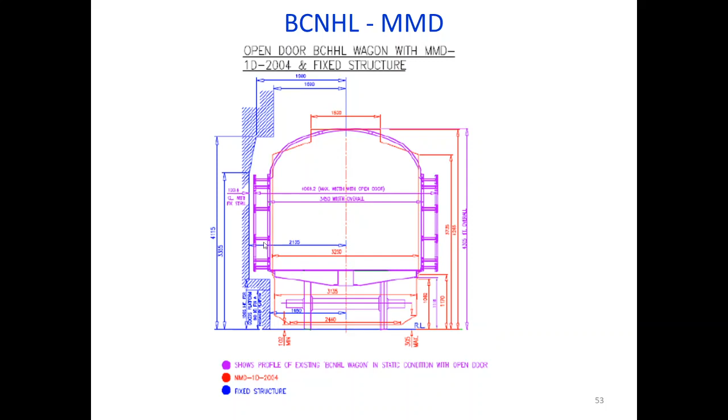So many complaints have been received. So many detentions or damages have happened. To overcome this, Railway Board decided to keep sliding doors. That is the latest design, for which instructions were given in the year 2012. All hinge type doors are replaced with

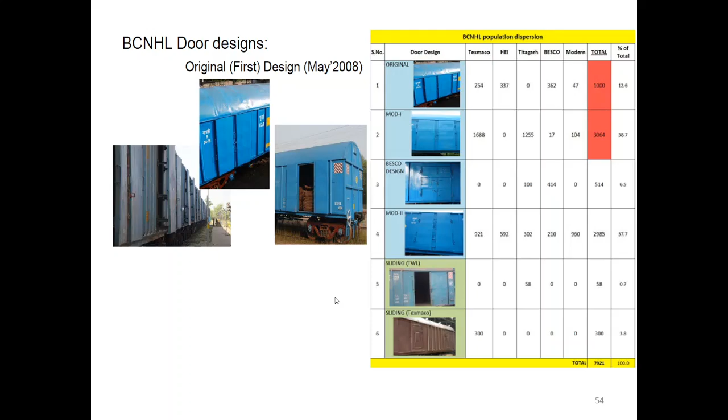sliding doors. Initially, this contract was given to Texmaco for manufacturing of sliding doors for BCNHL wagons. Subsequently, whatever available wagons should be retrofitted with the sliding doors in the workshops. Most of the contract is going to be completed. This is the modification we have extended on BCNHL wagons.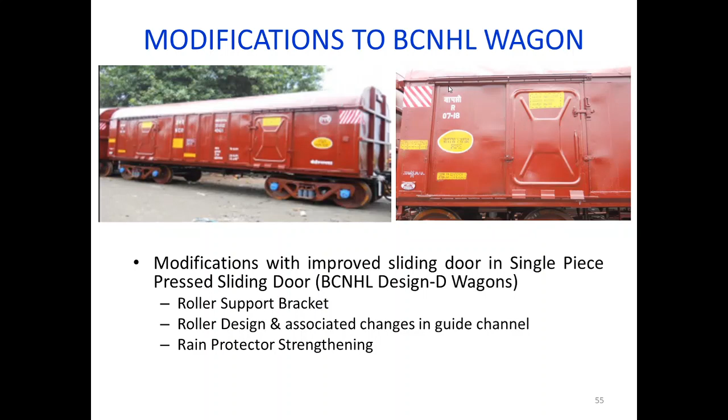Normally, the roller support bracket has been given strength, and the roller diameter in the roller design has been increased. The thickness of the rain protector has been increased. These are the modifications given to the BCNHL wagons. So for BOXNHL and BCNHL wagons, any doubts?

So, easy method. Normally paint will be applied in the workshops. There is an instruction that whenever a mild steel wagon is there, normally BCNHL is also manufactured with mild steel, then in that case they have to stencil with MS or SS. Magnet. IRSM 44 will not attract the magnet; with the magnet test also we can check it, but normally they have to stencil with SS.

This red oxide zinc chromate primer is applied as the finish coat also. Red oxide zinc chromate finishing coat. In that case, they used to give SS for stainless steel wagons, SS encircled in one corner of the wagon. Earlier it was Ferozi blue. Ferozi blue we applied in the beginning on the BOXNHL and BCNHL wagons.

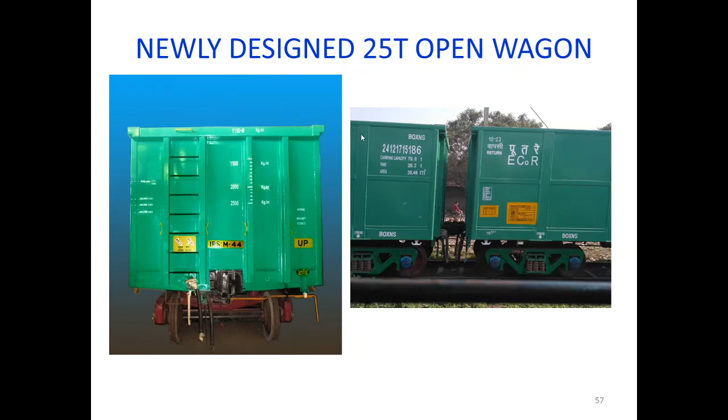Please cooperate. Okay, this is a new design. Hello, please. New designed 25-ton open wagon. Okay, just these wagons, BOXNS wagons, have been all introduced in our Indian Railway in the year 2016 and 17.

Okay, just you just guess that after 10 years of experience with BOXNHL and BCNHL, this stock has been introduced. Okay, to transport more commodity. Okay, what is the payload to tare ratio of BOXNHL? Payload to tare ratio. 3.4. Yes, exactly. Here we are getting 4. With the help of 25 ton open BOXNS wagons, we are increasing our payload to tare ratio to 4. 4 means if you go on increasing payload to tare ratio, please keep mute.

Please keep mute. Please keep mute. Noise is coming.

Okay, coming to our slide, BOXNS wagons. BOXNS wagons first introduced in the year 2016. Subsequently, they have started manufacturing bulk from May 2017. After introduction of BOXNHL wagons and BCNHL wagons, after 10 years, we introduced this one to increase our payload to tare ratio, especially, by increasing its axle load from 22.9 to 25 tons. So automatically we can transport 100 ton. Gross load will be 100 ton.

The tare weight of the wagon is reduced drastically because we are using here also stainless steel body. The thickness of the body is maintained the same. First, the railway board placed an order to Braithwaite. It is a public sector unit, Braithwaite and Burn Standard. Later on, we extended to other companies also to manufacture BOXNS wagons. The wagon has high sides and end walls for higher volumetric capacity in comparison with our BOXNHL wagon. It is an open wagon.

First introduced with doorless wagons, but some feedback has come to keep doors, so that whatever leftover commodity will be seen and cleared manually by providing these doors diagonally. Okay, to increase the high sides to meet SOD as well as MMD, here reduced its wheel dia to 840 mm.

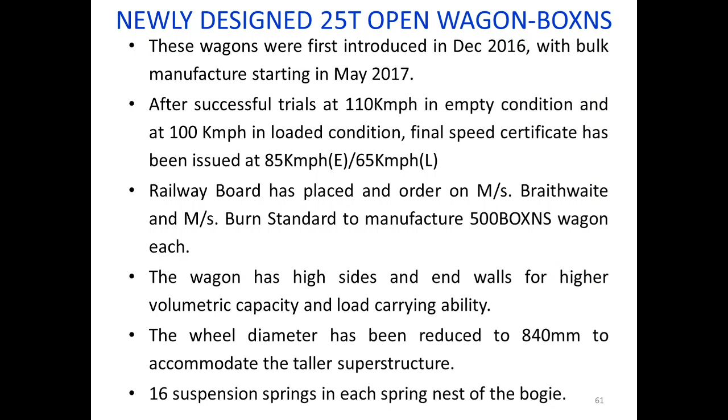Then fabricated body is made up of IRSM 44 because of its rust free, better durability and low maintenance, as used in BOXNHL. Under frame structure is 2062. That is mild steel. These high strength micro alloyed steels have higher yield strength, higher notch toughness, good fatigue properties, excellent weldability, and good formability. The material used here is somewhat different from our BOXNHL, because it will bear the load more and give superior properties which will extend its life, and formability, weldability also more compared with BOXNHL and BCNHL wagons.

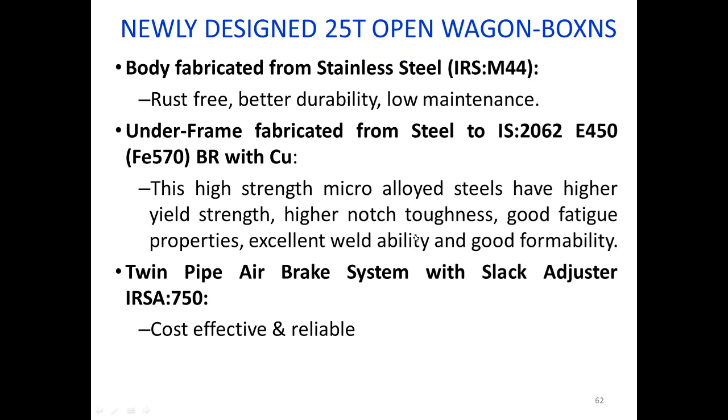And one thing, in BOXNHL and BCNHL wagons we are providing PMBS with twin pipe. Here, twin pipe with conventional brake cylinder only. In BOXNS wagons, twin pipe with conventional cylinders along with slack adjuster, because it is cost effective and reliable in working. Okay, coming to 25-ton axle load, carrying capacity increased by 12.76%, resulting additional 535 tons, in comparison with the BOXNHL rake of 59 wagons.

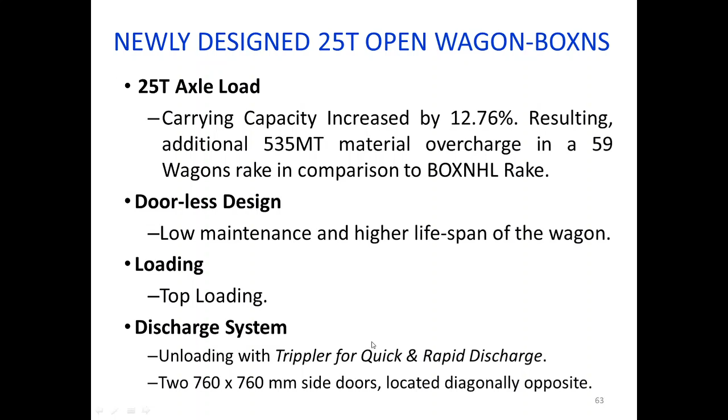Initially it was doorless design, low maintenance and higher lifespan of the wagon, but subsequently they introduced two 760 into 760 side doors located diagonally. Loading of this wagon will be normally top loading, discharge will be normally by tippler, and the structure of the wagon will be like this. Wagon is fully welded construction. There is no lock bolt, huck bolting and riveting technology for the side body. Here, wagon is fully welded construction with fishbone structure.

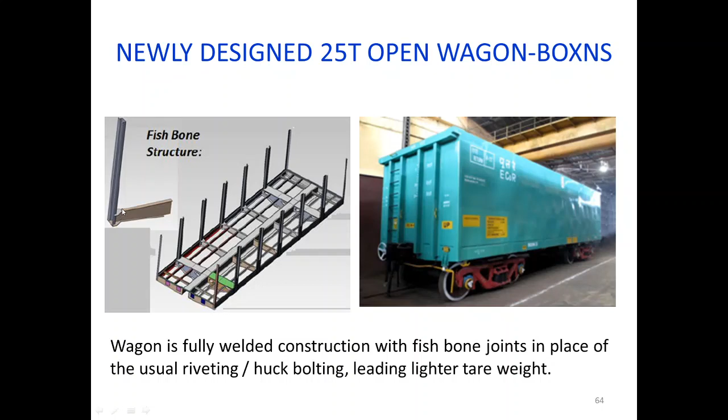This is the centre sill and cross beams, and side stanchions are provided inside the wagon. Okay, you are seeing here the side body will be flat. There is no side stanchion visible here, but side stanchions are provided inside of the wagon, and joints from cross beam to stanchion will be like this. Fishbone structure. This cross beam will hold the side stanchion like this, and will be joined with the help of welding. Okay, this is about BOXNS wagons. Thank you. Any doubt?